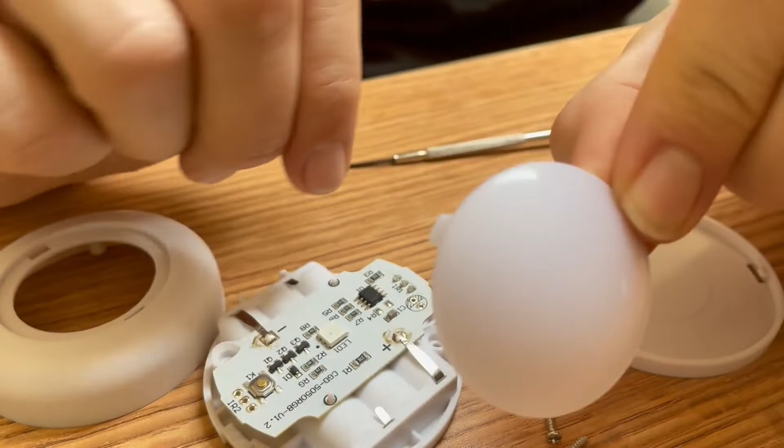Once you understand the concept of working in the 3 planes, X, Y and Z, it's easier to make that step up. So let's go.

The other thing I want to mention is purchasing a good set of calipers so that you can measure very accurately, because the design we're copying today is really rather small. So the smaller the design, the smaller margin of error. Something like these are really going to be your friend. You're able to measure some really small gaps, things like that, and it gives you a very accurate measurement. Just want to mention that this is a good tool to own.

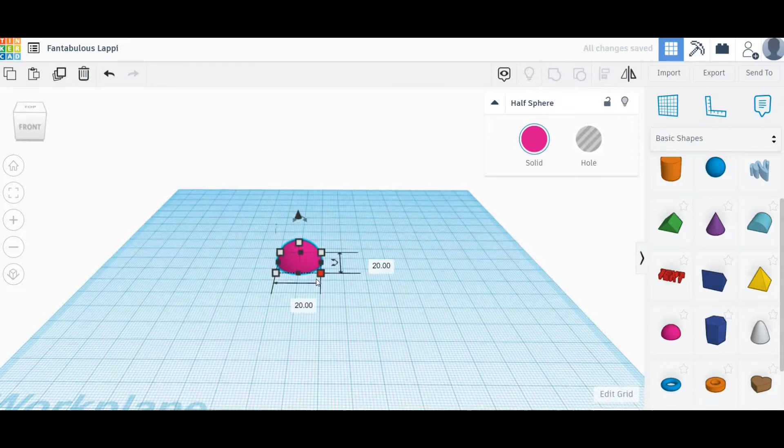So here we are in Tinkercad. We are going to recreate this dome cap. So we'll use the shapes that are already there. We'll start with this dome, and we'll put in our measurements that we took with the digital caliper. It's circular, so we've got to maintain the dimensions.

And there we have it. There's a dome. Okay, so the next part now is trying to get, we're going to need to get the height correct first of all. So again, go back to the calipers, measure it, put the value in.

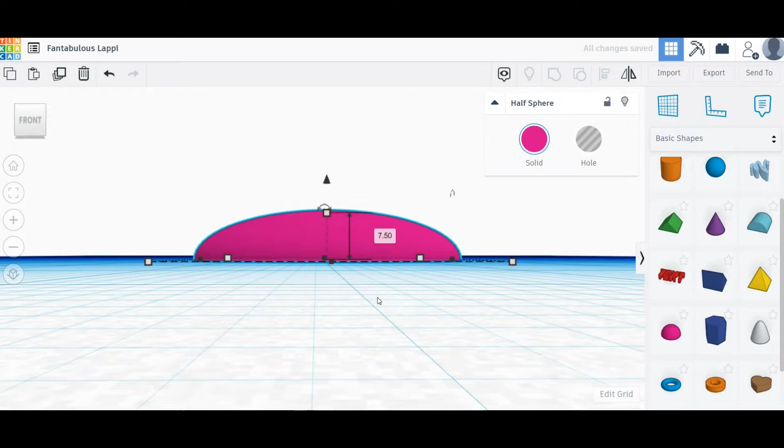So now obviously we need to make it hollow. So here's a little trick. We duplicate the image. So here we go, let's duplicate it.

And then now we're just going to make it ever so slightly smaller, so we get like a 2mm wall or a 1mm wall. Let's play around with these numbers. Let's put 39.5 now.

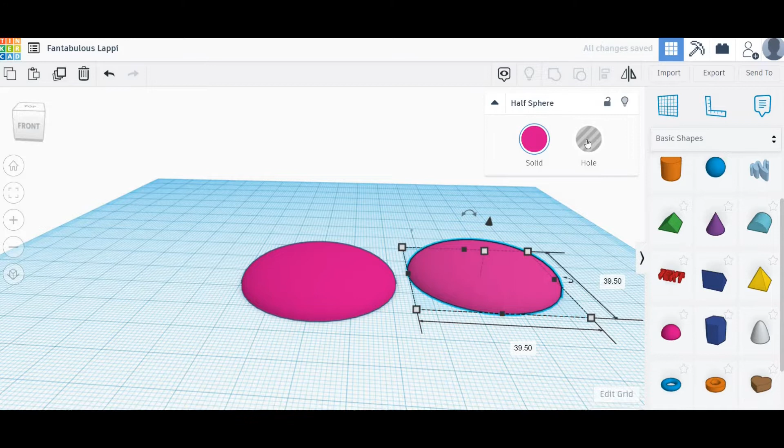So we'll turn it into a hole because we want to hollow out the original shape. And then here comes the nice little trick in Tinkercad. We can line it up perfectly. And there we go, so we can see it's in there.

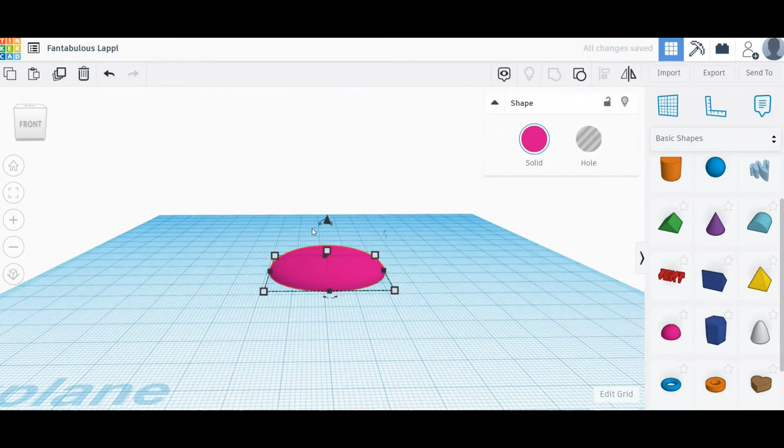So now we just need to group it together to make it one piece. Just allow it to catch up here. And there we go. Oh, we've gone too far. Okay, let's redo that, we don't want the hole in the top.

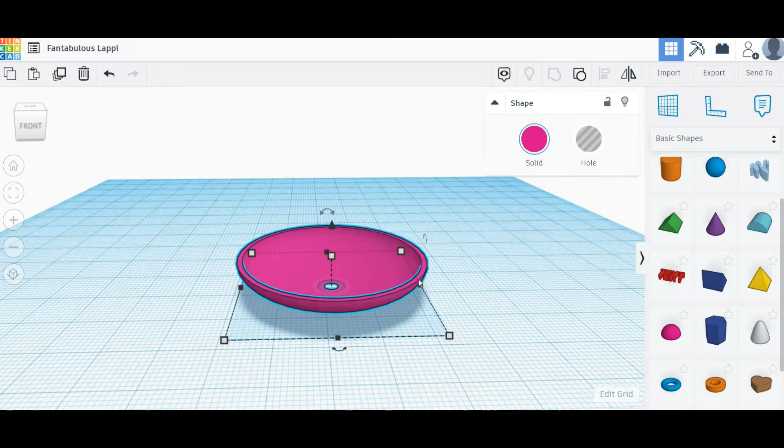So let's ungroup it, and we'll just pull the hole slightly further out. Like I said, this is where the experimentation comes in ever so slightly. But the tools are easy enough to use, so you can get it right. Let's go down to 1mm actually.

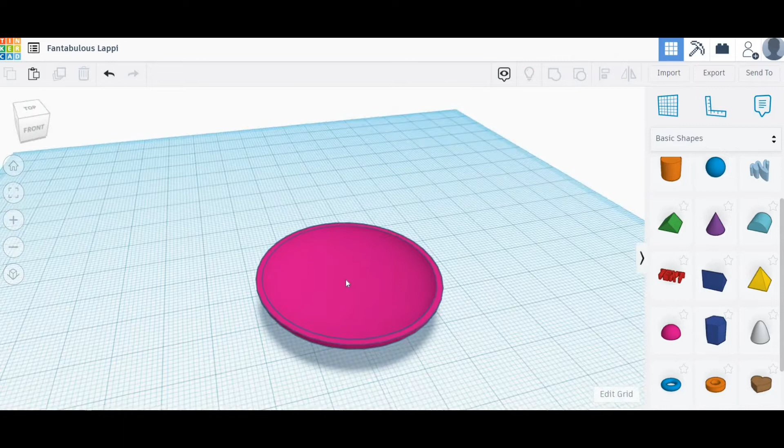Let's see. That's it, so let's group this now. And there we have it. So there's our dome. So now we just need to go ahead and make the legs.

So again, going back to the shape builder tool, there's going to be something in here, so we'll just use a square block along with the wedge piece that I can see.

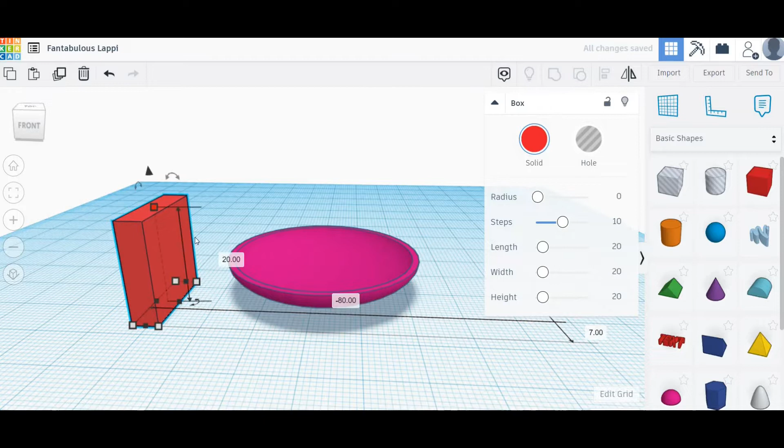So let's just reduce these dimensions down a bit because the legs are tiny. We did measure them, so it's about 5 mil by 4.5 mil. So height is about 4.5, the width is about 5. So let's just get this block sized up.

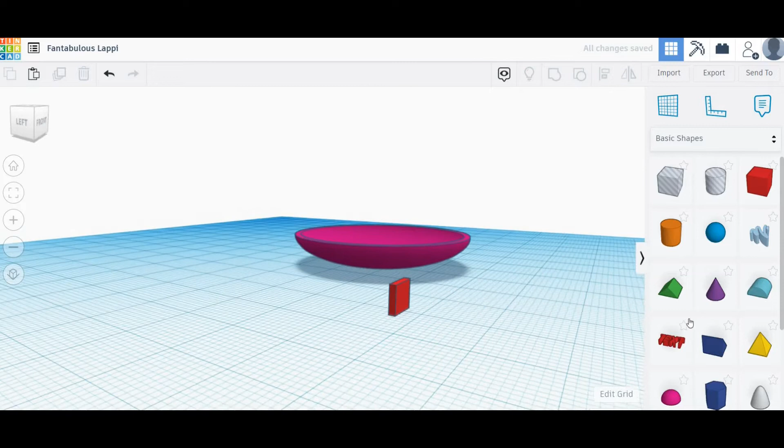So we'll make it 1 mil thick at the moment, because the legs aren't very wide at all. It's going to be sitting on the edge of the lip of the dome anyway, so we can marry it up that way. This wedge is far too big, so let's get it in place.

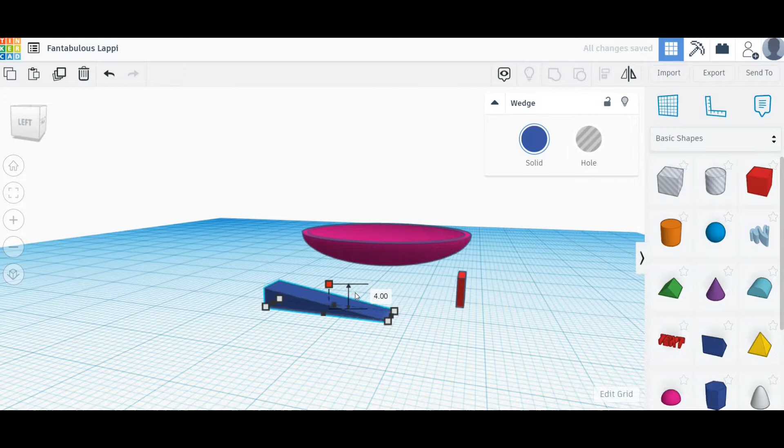There we go, the handles for resizing make it really easy to use. I'm zooming in and out with the mouse wheel. And if you right click, you can move the angle and move the actual view around, so you can center it differently.

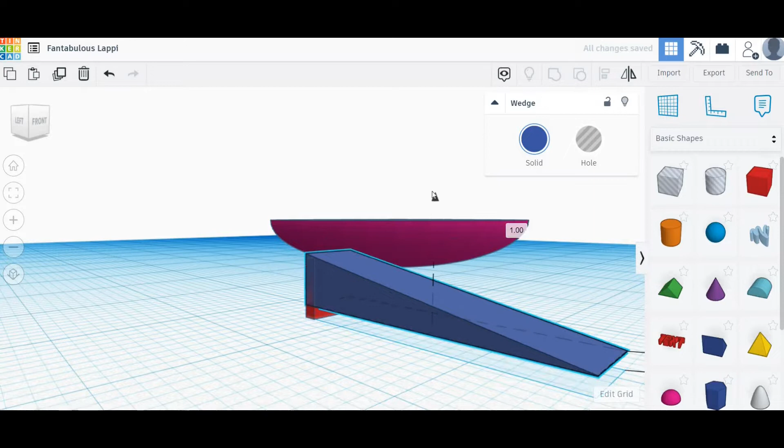So let's shorten this a little bit first, get it up to where we need it to be. There we go, that's looking more like it. It's not an exact point, so we can deal with that in a moment.

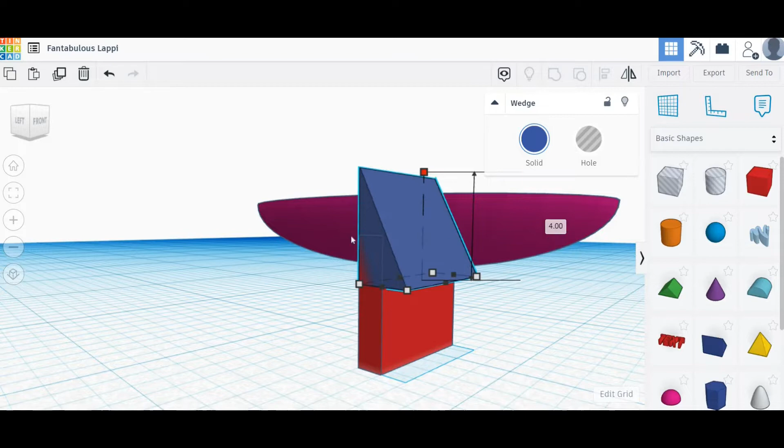Let's group this piece together to make it one, and then we can chop off bits of it. In fact, let's see if we can resize it here now. Nope, too far—we don't want that straight edge in the middle of the wedge. So let's just group this piece as it is for now. That makes it one piece.

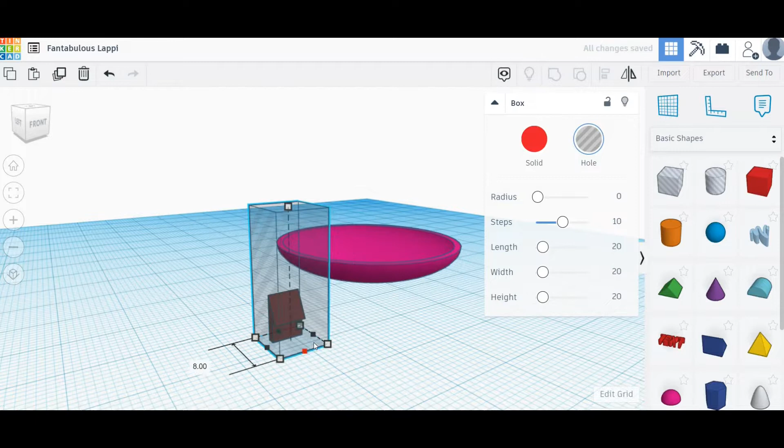Now we can use a hole shape again, just to take that piece off the top, because we don't need it that long. This doesn't need to be precise because we're just going to use it to cut the top off, basically, to make it more manageable.

That's it. Maybe one more—yeah, further down a bit more. You can change the amount it moves by the edit grid button in the corner there.

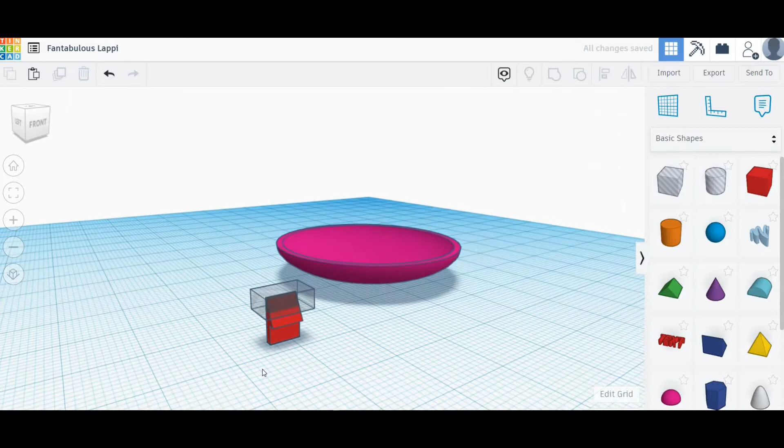So there we go, that's looking more like it. So what we need to do is duplicate this now for the other side. All the work is done, and we just need to flip it around.

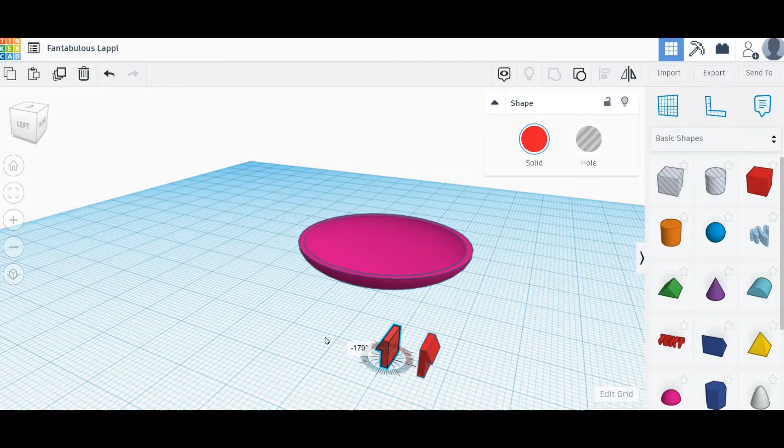And again, you can punch these numbers in. As you can see, I'm using the mouse to line it up. It can be a bit fiddly, but if you want to tap the number in, you can. So let's just see if these line up, which I'm sure they will do because they're exact duplicates. Yeah, there you go.

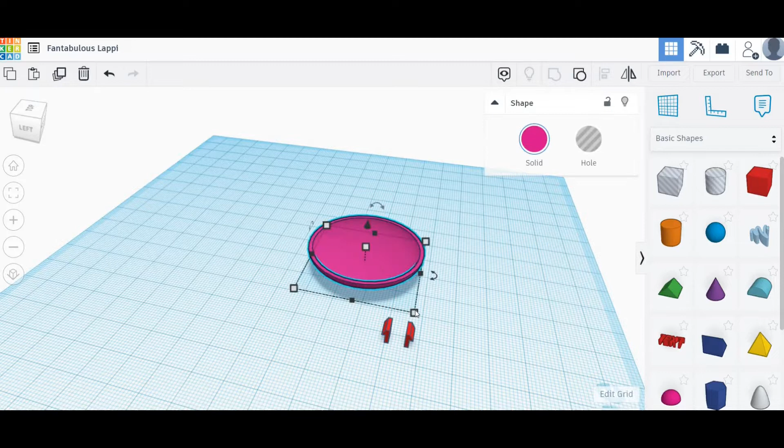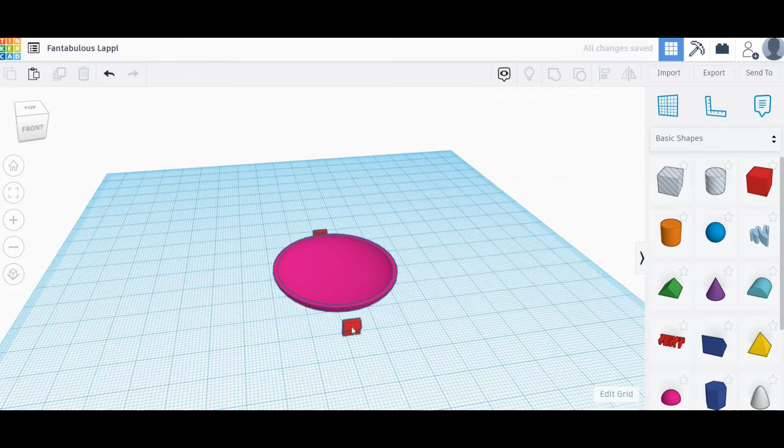So now let's put them onto our dome piece and just line them up that way—this one over there, this one over here. Moving the view around with the mouse is very, very nice and quick, just to get an angle on the piece that you need to really put it in position. Because working in X, Y, Z, you have to get used to it.

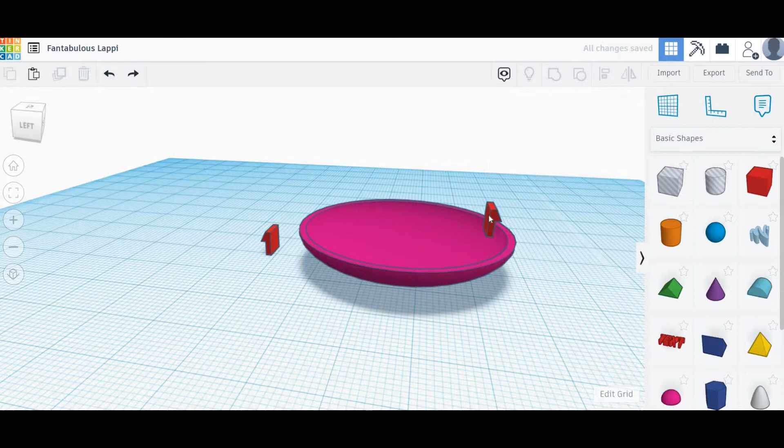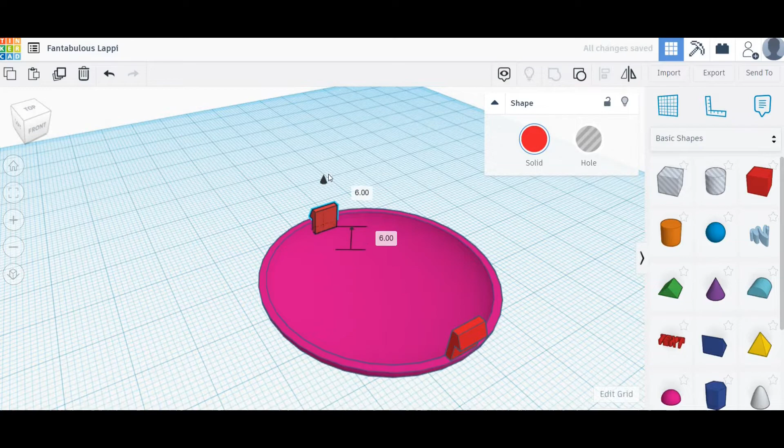Oh, I don't want to change the height. Okay, so we are getting there. Let's just place it on the very edge here. I'm moving this with the arrow keys, and they will move by the scale that you've set on the edit grid button, so you can get some really fine detail and get it exactly where you need it.

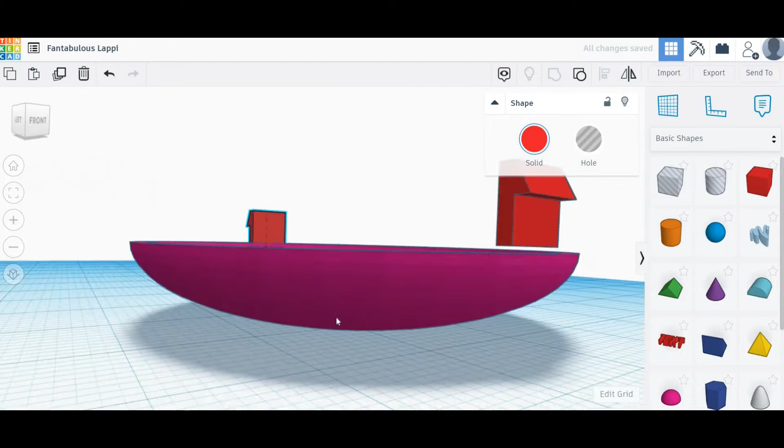Okay, so that looks like it's on the edge there. The critical thing here would be getting the height correct where the actual legs are going to sit. So we're going to print this piece and see where we are with it. Let's just line these legs up with the piece itself.

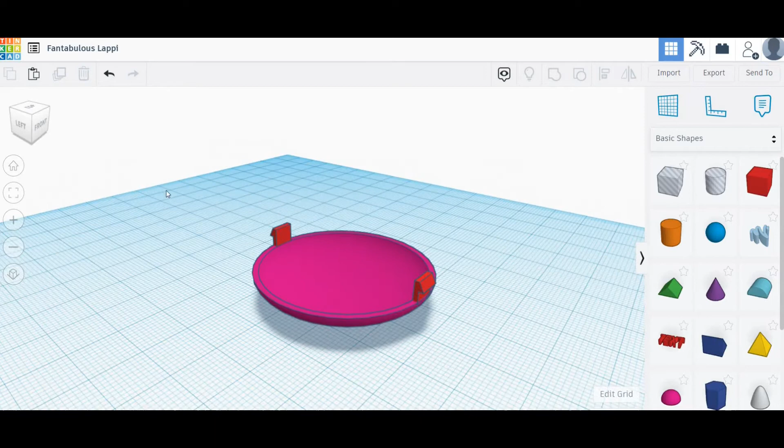There we go. We don't want to put the middle button, nope, or that one. So that is right. So all we need to do now is group it to make it one piece. Just checking out all sides, it's all lined up. And there we go.

Okay, so that is our dome piece recreated. So all we need to do now is send it to, or put it into Cura, and get it printed so we can start testing it.

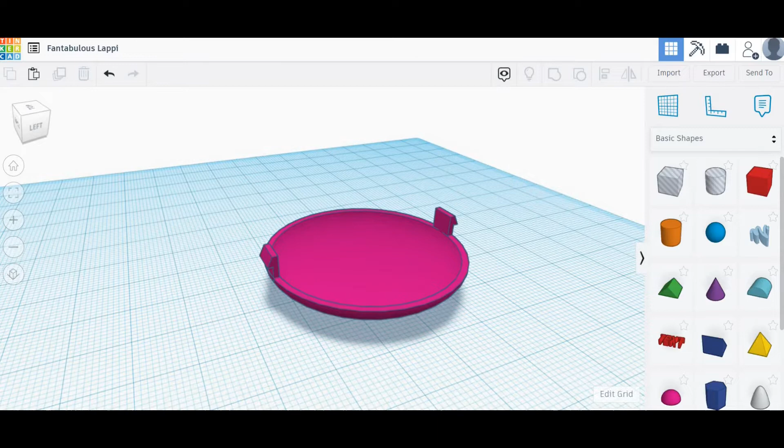So let's export this as an STL. Let that download.

Moving into Cura now. Let's get that piece in there. Gives it a funny name. And here we go—looks good.

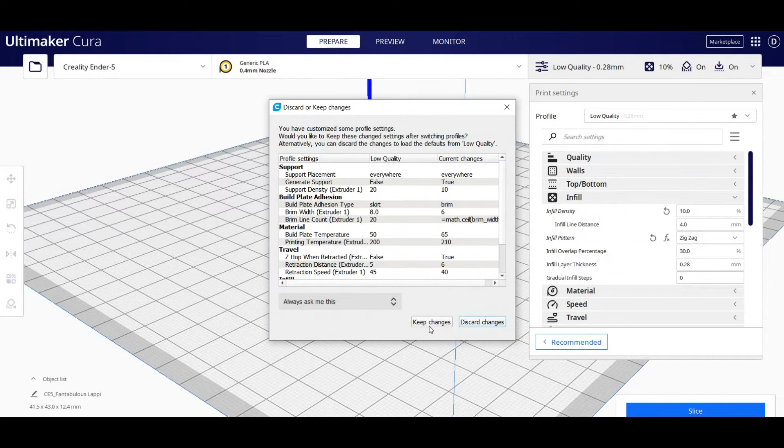So here we're not going to print at the standard quality, we're just going to print at draft quality because it'll be much quicker and use less plastic. We may have to print this several times because this is our template piece. We'll print it to put in place of the original to see how far away we are, and then use this piece as a template to work out where the legs need to be for any model we create for the top.

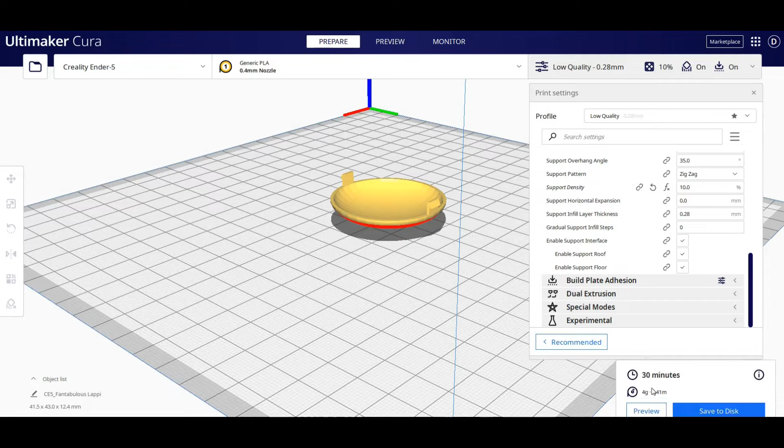So let's just slice this, and there you go, half an hour, not too bad. Let's check it out in the preview. Here we go, we can see all the supports that's going to print. That should be pretty quick. Let's get it printed.

Okay, as you can see, I printed several of them. Here's the original piece, and here is the eventual final piece that it actually turned out to be. The reason we have these other pieces is because they're failures. This one with no legs, I tried to press it into the holes, and it was slightly the wrong angle or wrong width of the leg, I think, and it just pinged off and snapped.

Eventually, when I got down to the finer points of the design and worked it out, it did actually work. So we've got a perfect replica, and I'll show you by putting it in place right now into this enclosure. So here we have it, it's in place, it's in the lights, and just to show that it does work, there we go, it shines through quite well.

And remember, this is the draft setting, so if we put it up on the higher standard setting, we get a much cleaner finish. But part one is done for now, so we can use this as our template to put any model we want on top.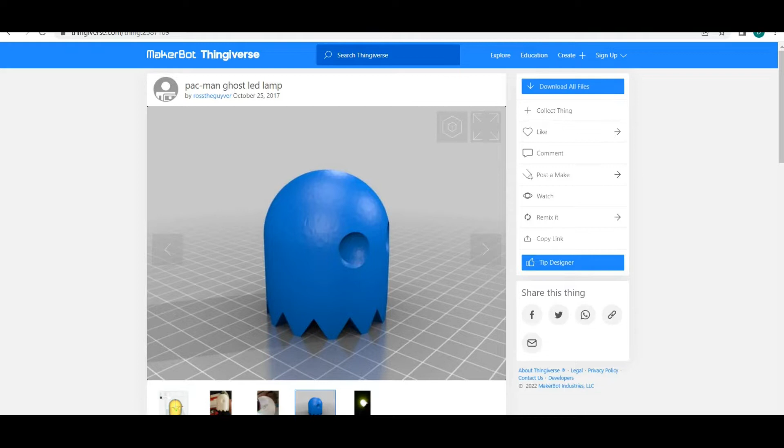Right, so moving into Thingiverse now, we're going to look for a couple of designs. I found this one called Easter Cats by Tomo Designs, and the other is a Pac-Man Ghost by Ross the Guyver. This one looks like we'll have to hollow it out, but that would work really well for the top of the lights. So I'm going to go ahead with these two. It looks like we might have to modify this ever so slightly to make everything fit, but these are the two designs we're going with for now.

So let's download them and get them into Tinkercad.

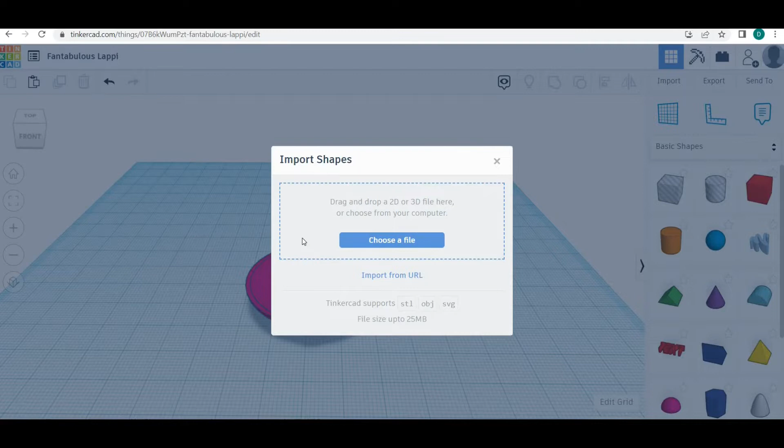Okay, so here we are back in Tinkercad, let's get this model imported. It came with several different styles of cats, so we're going to choose the Winky Cat. And we're going to just scale it down a little bit here to get it imported ever so slightly quicker.

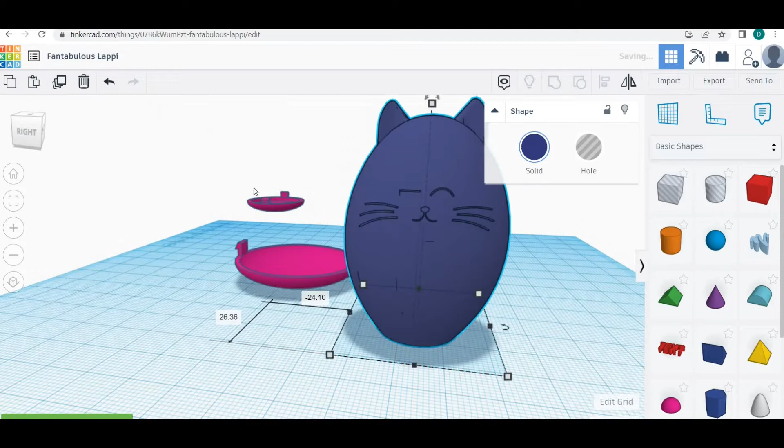This bit can take up to a minute to import, so I've shortened the time here a little to save you on waiting. And there we have it, here's our model. Okay, so first off, I see we can't use the part with the tail because it tapers off, the main body tapers off towards the bottom there. So let's cut this down to get the fattest piece, so then we can eventually get it to line up with the legs. Let's just move that out of the way.

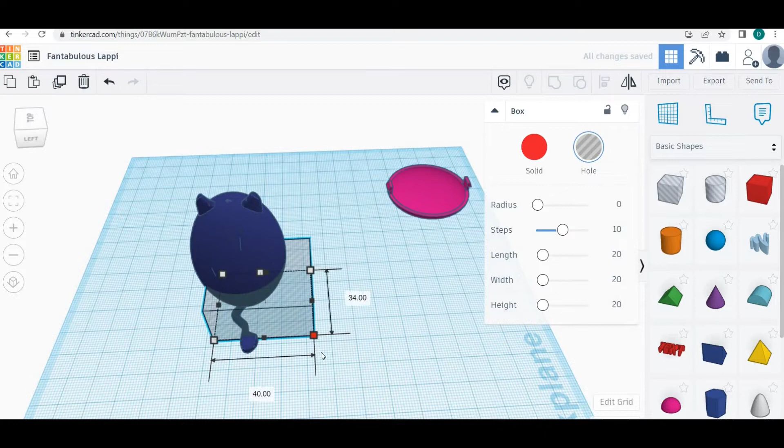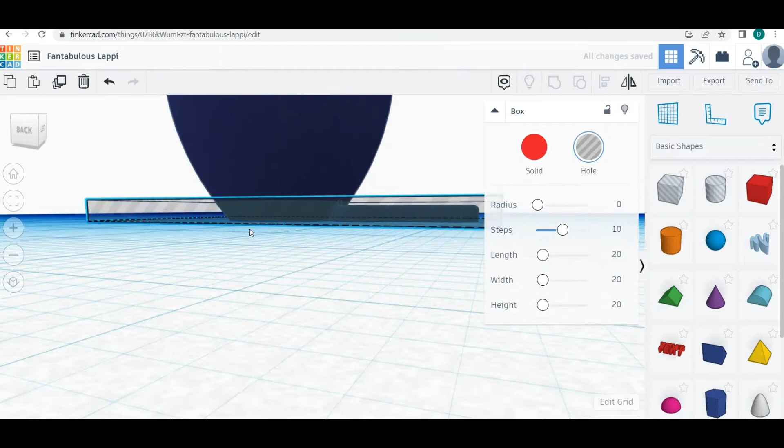Okay, so here we are, we have a hole. Let's just get it roughly sized up, and we're going to cut it down to the point where the tail starts, just so we're working with a model that we can then centralise and marry the two pieces up together and perfectly centre them.

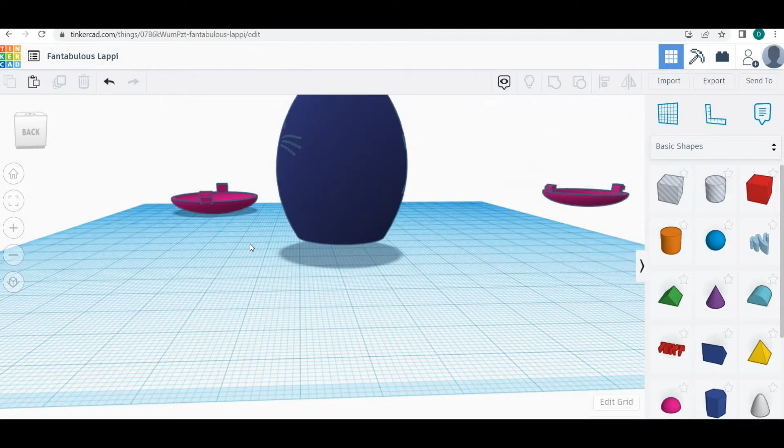Okay, so that bit has gone. Now we can put our template piece over the top of this piece, get them grouped together and all lined up, and then we can see at what point we can get the width of the cat's body to meet the width of the legs. So let's just flip this over, get the right way around.

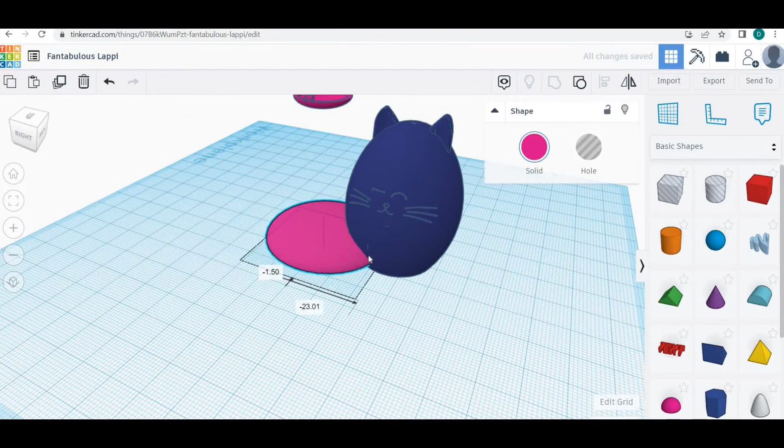And I can already see it's going to be way off. That's probably because we scaled it down 75%. Let's just have a look how far off we are. Yeah, we're quite off here. Okay, so let's get the cat slightly bigger, it's the only way to solve this. Yeah, I mean it lines up, but obviously the sizing doesn't.

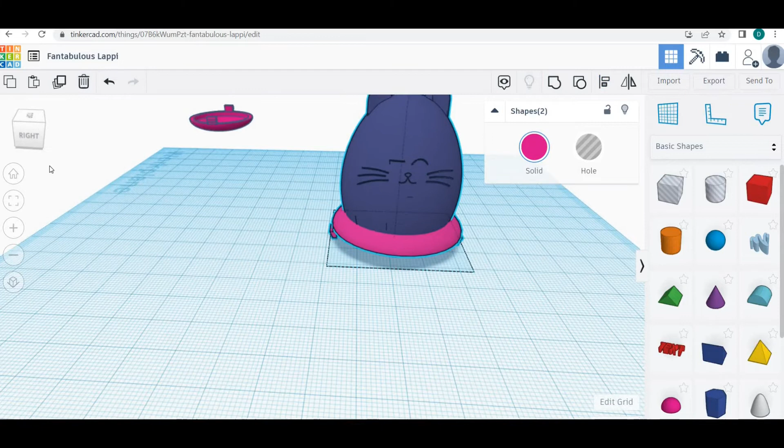So let's take this up to 50. There we go, that's more like it. Okay, so now let's line all these up again.

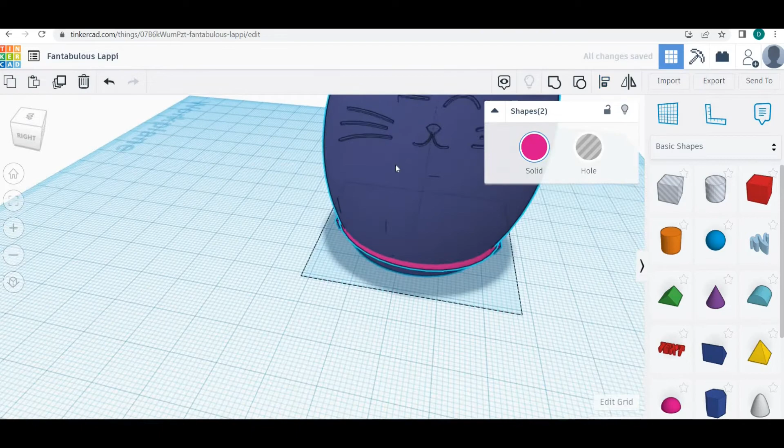Okay, so we're a lot closer now. So now let's just get the body to the point where it meets the legs. Just move the model down a bit. So we're going through the floor here.

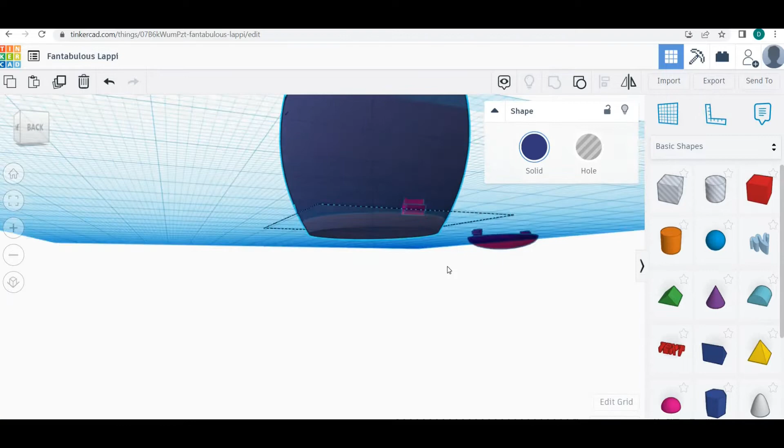So what we're going to do is cut the model down to the point where the legs are actually meeting the main body here. So let's pull in a hole.

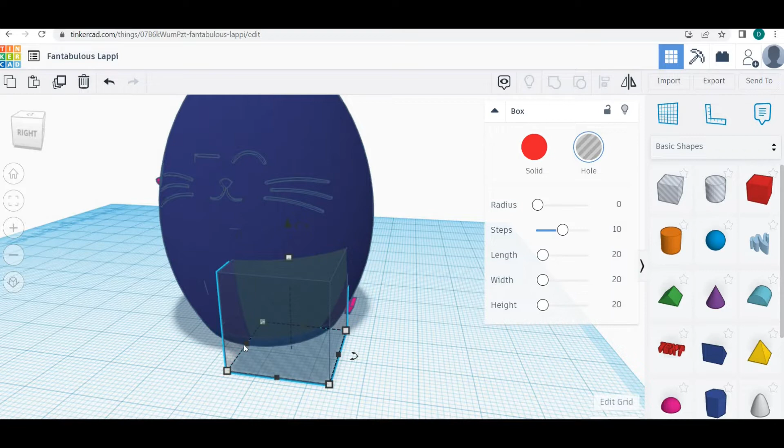A lot of these processes that we use in Tinkercad are all the same, so this is a good example to show you where you can use the holes, the lining up techniques, the grouping techniques, all this sort of stuff, just to make your life a bit easier and to understand how the software works and how to get the most out of it.

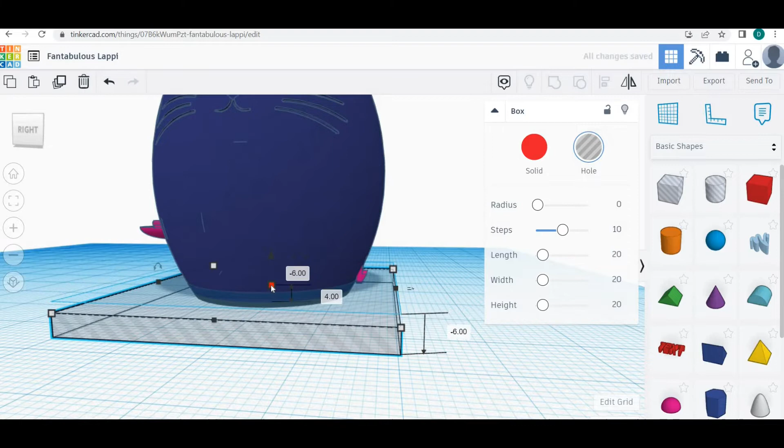So here I realize we're going to have to cut through the floor a little bit. So let's get the hole to go right through the floor, up to the point where our legs meet. And then we don't want to delete or remove those legs.

We could have made a copy and removed it anyway, but it'll then be forever part of the model, and we don't want that. So let's just move that out of the way. We have to go into it just to get a piece that we can grab.

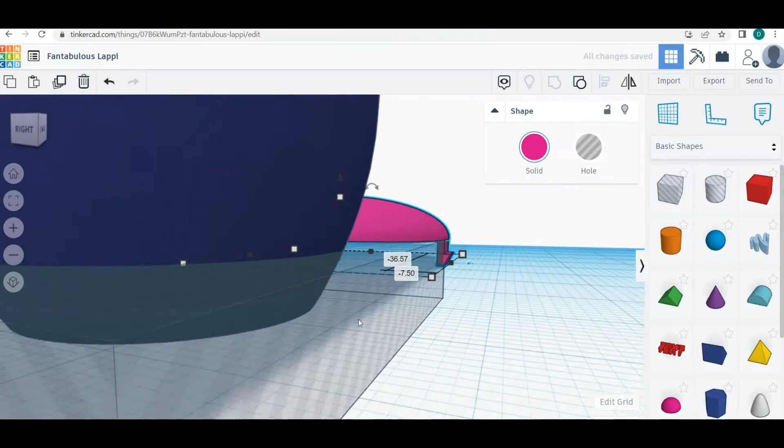And now let's group this. Sorry, no, not group it. No, we don't want to group it. Well, we do want to group it, but we want to group the single model.

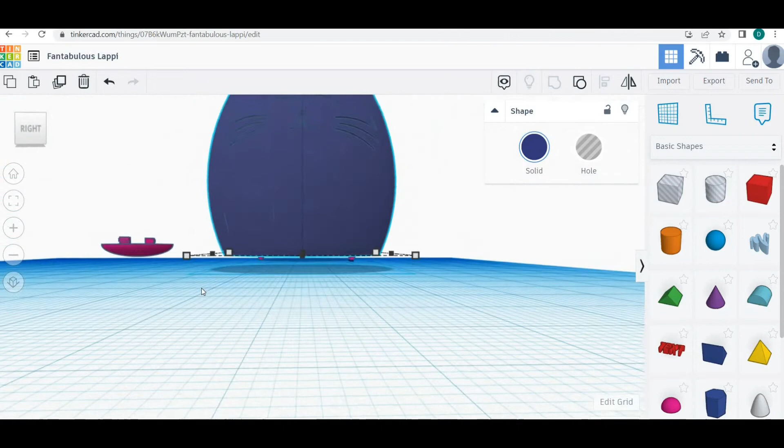Okay, there we go. Right, that is looking more like it. So the only thing left to do now is to hollow out this cat, and again, I already showed you the technique for doing that, so we're going to replicate that again here.

That involves duplicating the piece, turning it into a hole, marrying them back up again, and then we're left with a hole. So here we go. So we've got it duplicated.

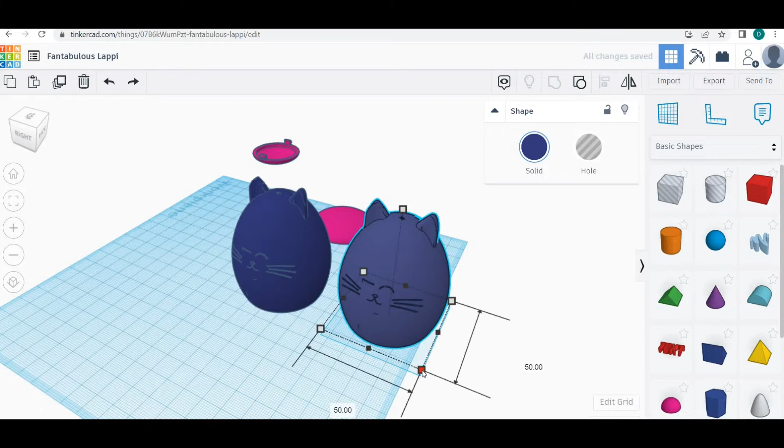We're going to make it ever so slightly smaller, so let's go down to 46. Yeah, 46, come, let's go. Let's go to 46, so even on each side.

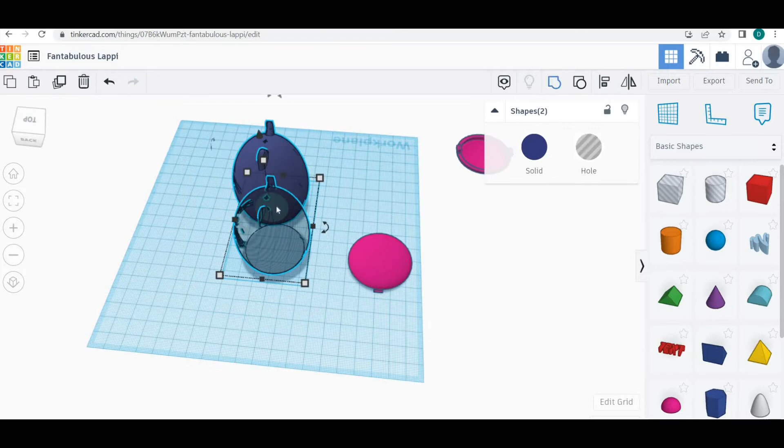Okay, so let's get these two married up. Yep, sorry, not grouped, I want to line them up, so let's just ungroup that. Here we go, right, line them up.

Completely centered, so one piece is inside the other piece now, so we're going to have to lift this slightly just so that we do get a hole at the bottom. Otherwise, it'll only hollow the center, the very middle. And I can't see where that's come out.

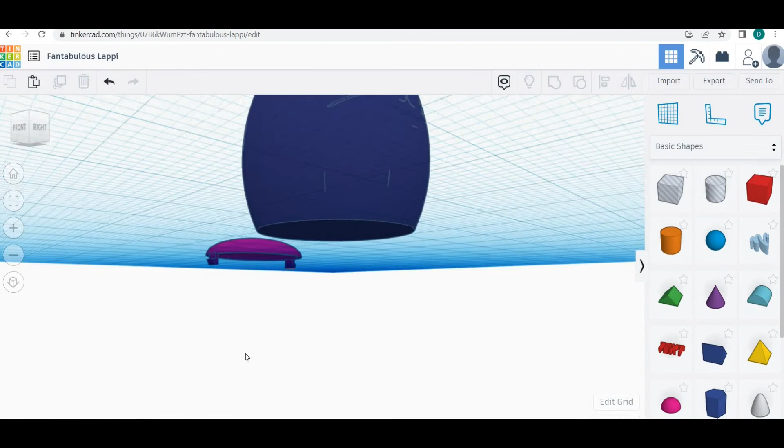Let's do that again. Here we go, right, okay. So, yeah, let's get it sticking out by a mil or so.

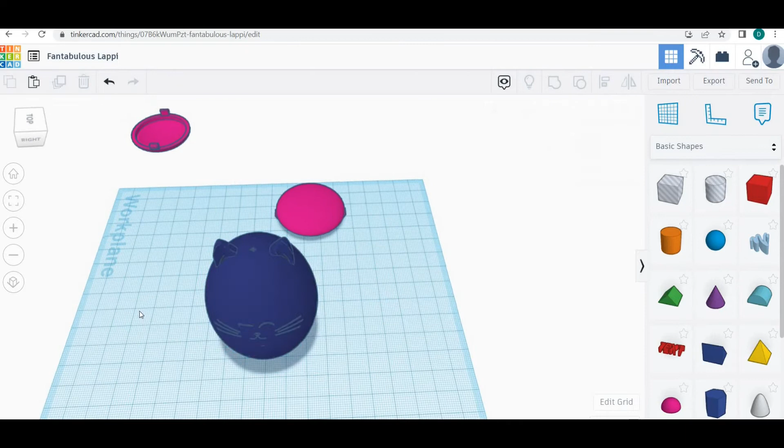So it doesn't matter that it's floating at the moment, because we're going to put the legs on in a moment. Okay, so now we should have a hollow cat.

Looking good, let's just double check. Yep, it looks hollow to me. Okay, right, let's get the legs on.

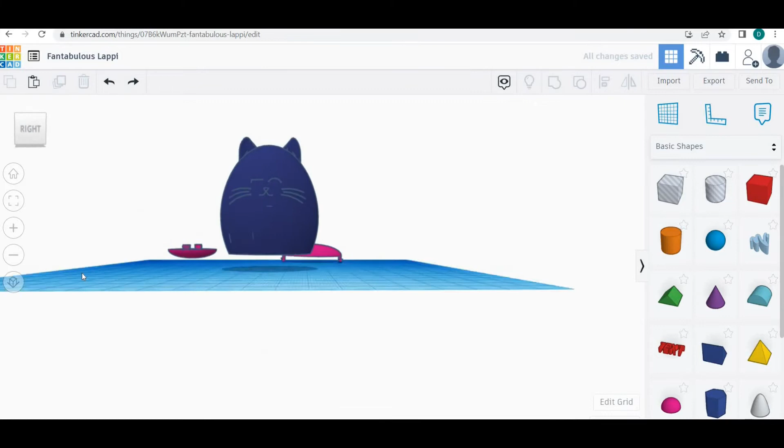So again, we're going to ungroup this piece that we made earlier because we don't need the dome, we only need the legs, and remember, we only did this to get the legs in the correct position.

So again, let's remove this dome, let's get rid of it, we don't need it. We're going to have to group the legs together though, because at the minute they're two individual pieces. So let's get this grouped.

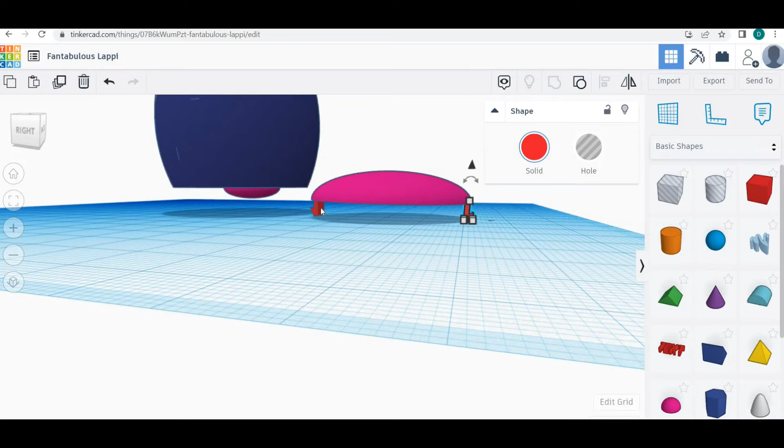And remove the dome, let's get rid of the dome, don't need it. So just need the legs. And again, it's the same tool again. We line up the legs with the bottom of the cat body.

Group it, we want to line it up, that's it. Line it up first, then group it.

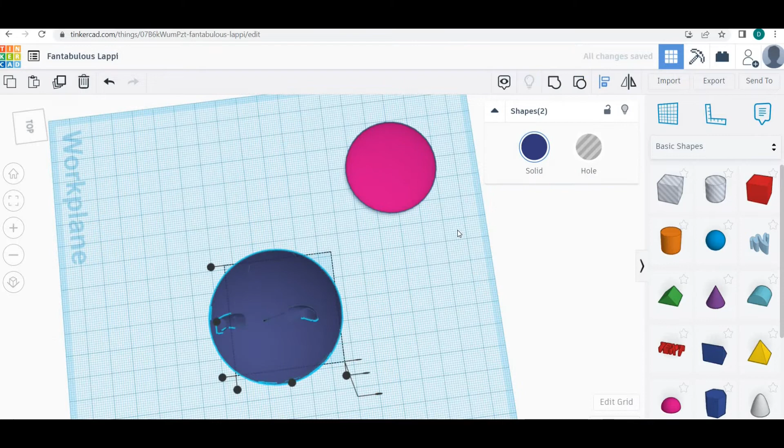So we're slightly high here, so let's just bring that model down, bring the cat model down to meet the legs because the legs are on the floor. There we go, looks good.

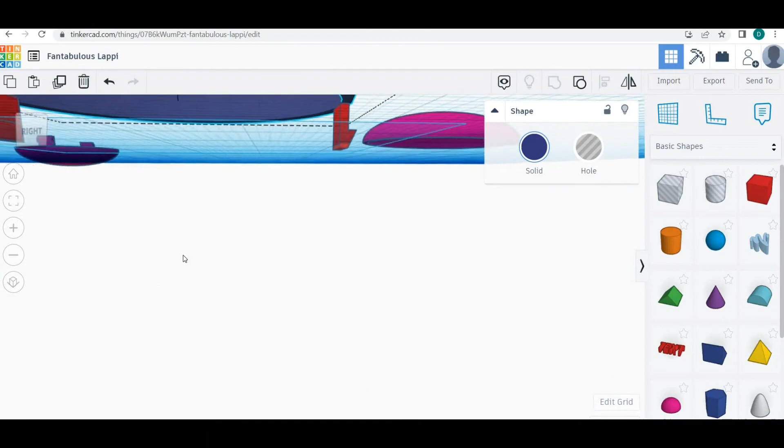And in Tinkercad, the colours are designed to show you pieces that are not grouped together. So you may have noticed that when you do group it, it all becomes one colour. So when they're not grouped, they are different colours.

So let's just change our scaling here, let's go 0.5 mil, so that when we move this, it moves at 0.5 mil as opposed to 1 full mil. So again, you can take that scaling off completely, so you can have it 0.1 of a mil.

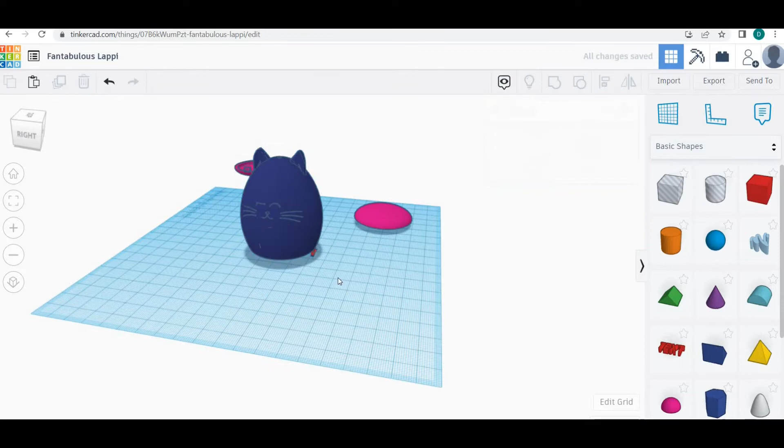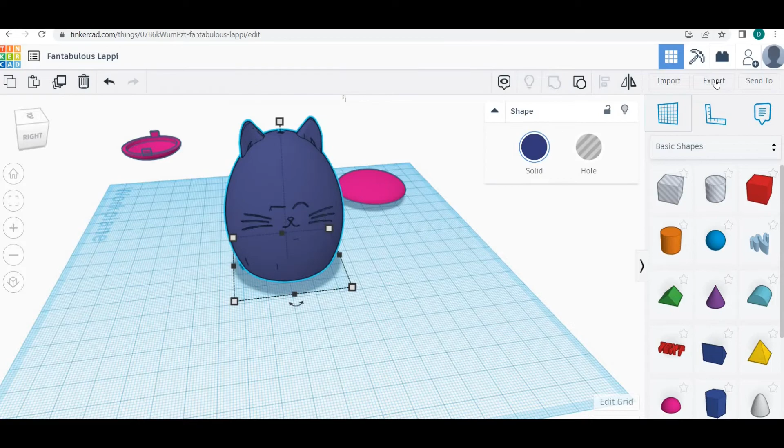And there we go. As a first look, it looks good - first design looks good. So again, let's get that grouped, and it should turn into the same colour. There you go. So that is one piece now, which we can export and get into Cura.

As I mentioned before, you could do this on a draft piece, just to save yourself a bit of time. But I'm also going to show you another technique for saving time straight after this. Let's just get this model finished first.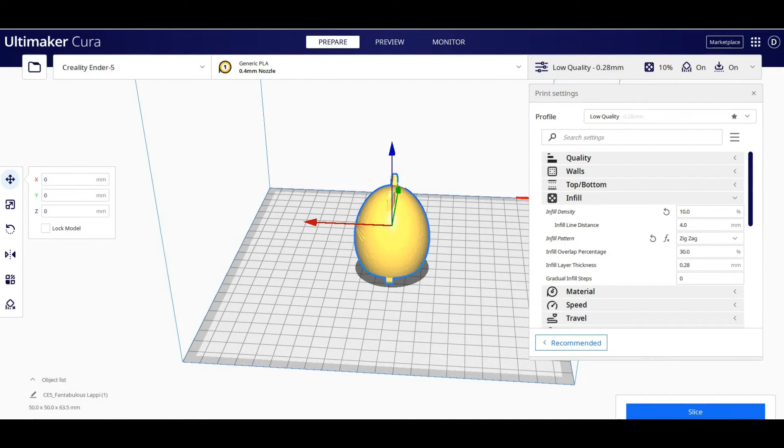We're going to print it upside down, because otherwise it would need a lot of infill in the centre to generate support before it eventually prints the top. Whereas this way, once it's done the bottom piece, it's just a case of the nozzle going round and round in circles to build the rest of it. That should save us a lot of time and plastic. So here we go, 2.5 hours, that's on low quality.

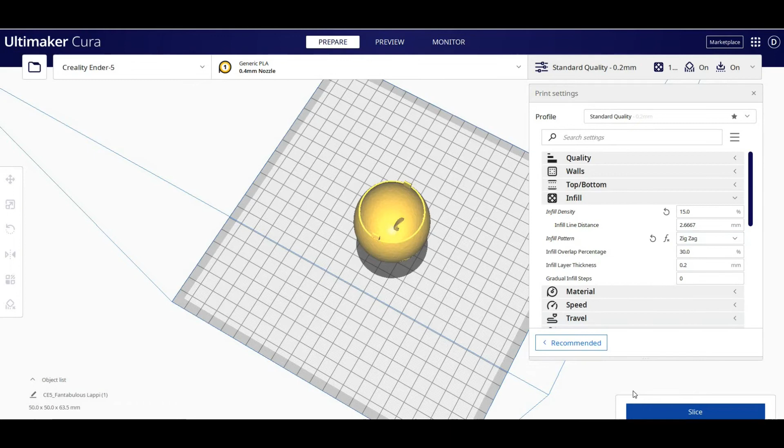Let's just get it up to the standard quality. Infill, let's go 15%, so anywhere between 10 and 20 is good. Let's get the zigzag infill pattern and slice away. Let's have a look, let's see what happens here.

Okay, so it shouldn't be much longer than 2.5 hours. Oh, there you go, just under 3 hours.

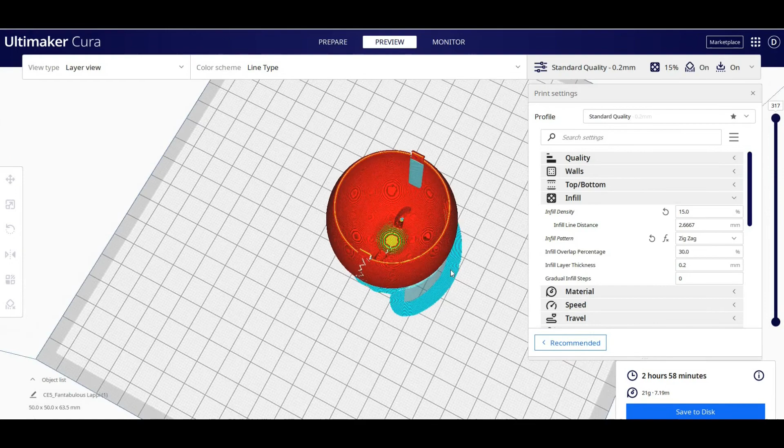Let's have a look at how it's going to print. The blue bits you see are the support material. In Cura they've now added support blockers, so if you don't want to print that support, you bring a blocker in, block off that piece, and then reslice it, and it removes the support in that area. Can be a bit fiddly, but it's better than nothing.

Okay, so let's get ready to print this, and away we go.

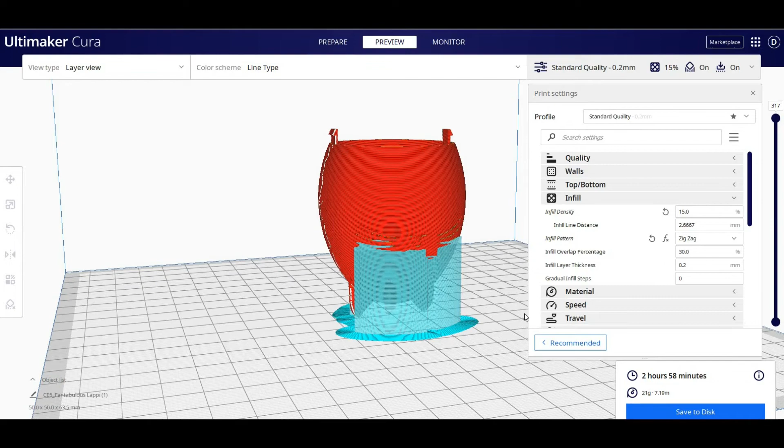Before I show you the final pieces, I just want to mention that you probably won't get the design right first time, as is the nature with developing anything new, which is why it's important to use the tools to correct any mistakes, such as the calipers. Even when you're going through the design process, you can dial down the quality settings on the printer to print what are known as draft pieces.

Until you go for the final piece which you know is going to work. I just want to talk about another process I used in this design, and that was to only print the bottom piece of the model, using the same technique in Tinkercad to make a hole, and I just chopped the entire model off so I only had the bottom bit.

So I knew that this only takes like 20-25 minutes to print, to get the design right for the height of the legs, because this was critical, and this is where the calipers will come in really handy - you can print down to like 0.1 of a millimeter to get that absolutely perfect.

In this case, the lid had to stay relatively loose or have some wiggle room in order to push the button and spring back into place. So yeah, I just wanted to mention that we can make draft pieces such as this.

And so here they are in their final form, just so they do work. I can control the colours. As you can see, I did make the ghost as well, which was exactly the same technique as the cat - hollowing out the piece, lining up the legs, measuring, printing.